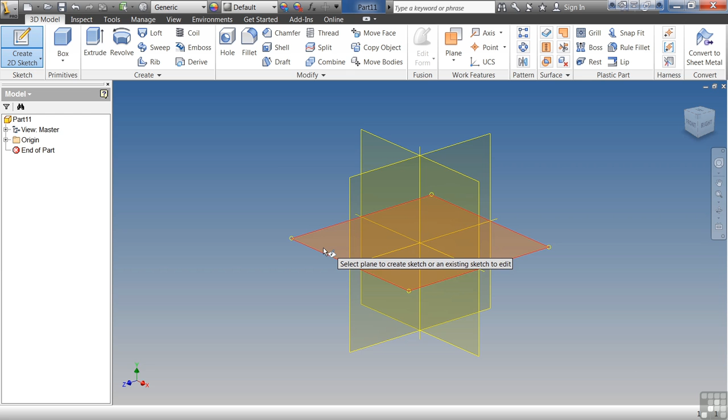Let's take a look. I'm going to go up to the New command, select the standard IPT, select Create. From here, I'm going to start a new 2D sketch. I'm going to select on my base plane. As I start to draw, you'll notice these little glyphs down by my cursor. These are Inventor trying to automatically apply geometric constraints to your drawing.

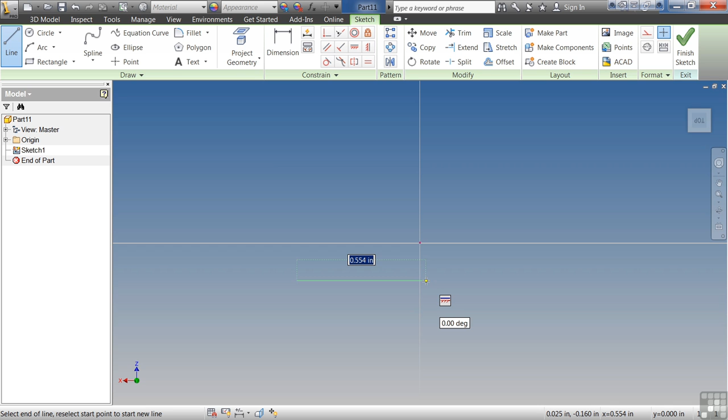The geometric constraint beside my cursor currently tells me that this line is always going to be held in a horizontal position. This is in relationship to the sketch and its current orientation. No matter what I do to the sketch, until I delete this constraint, it'll always be held horizontal. If I start to draw an arc, I get a glyph down there at the base telling me that it's going to be tangent to the existing line.

So I keep going. This line, not only will it be tangent, but it'll also be parallel to the other line. Now you will notice at the end it's giving me a dotted line, and basically that's an implied constraint, meaning that it's not actually going to put something on there, but it allows me the next operation to come down and go a perpendicular line and then it meets up perfectly. It's kind of like OSNAP and the object snap tracking in AutoCAD, if you're familiar with that. It's just a little helper tool to let you close off the geometry correctly.

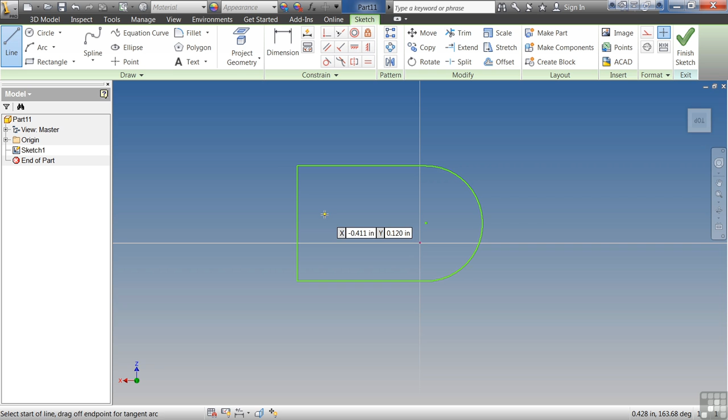Once you're happy with the geometric constraints you've added to your drawing, then you can add dimensional constraints. As I'm sketching, I get the implied constraints. But how do I know what constraints have been applied later on down the road? Or, even in this drawing, it's hard to remember what I've just done. If I hit Escape to get out of the line command, I can come up to this little glyph up here that says Show Constraints. Click on that, and then I can select on each line individually, and it'll tell me what constraints are assigned to that line.

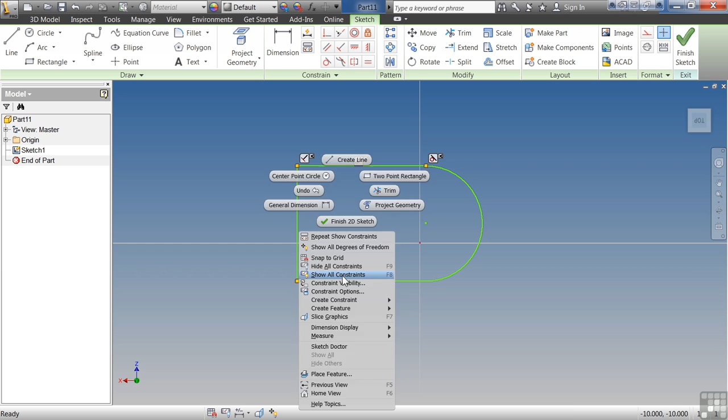Likewise, if I hit Escape, and I right-click, I can go down to Hide or Show All Constraints and see all the constraints in the drawing. The same command is available in the function key F8 for Show All Constraints and function key F9 to hide all constraints. Now, even though the constraints are not shown, they are still applied to the drawing. So if I come in here and try to do something, I can't modify the geometric constraints even though they're not shown. They just turn that off for convenience.

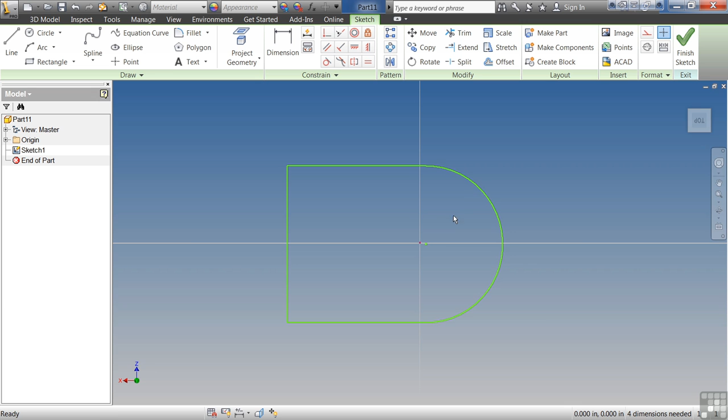So remember, if your drawing's doing something you don't expect it to do and you can't figure out why, do a quick F8 and see if it's automatically added a geometric constraint that you weren't expecting. To remove one of the geometric constraints, simply highlight it, hit delete on your keyboard, or you can click on it and right click and it'll give you the delete command. And so now that constraint is no longer there. I can actually warp and change the shape of my design.

Once we get the sketch fully geometrically constrained, then we move on to the dimensional constraints. With Inventor, you always start with the geometric. What you do is you draw something out, you get your basic shape how you want it, and then you start adding the geometric constraints and then the dimensional constraints.

For those of you who are familiar with AutoCAD, it may not seem intuitive to design this way. In AutoCAD, you had to draw everything out and create these precise sketches that didn't have any intelligence in them. So you could only do it one time, and then you had to go back and manually modify stuff. In Inventor, you get the design intent first by sketching out your basic shape, and then you start refining that design intent by adding geometric constraints, and then later with dimensional constraints.

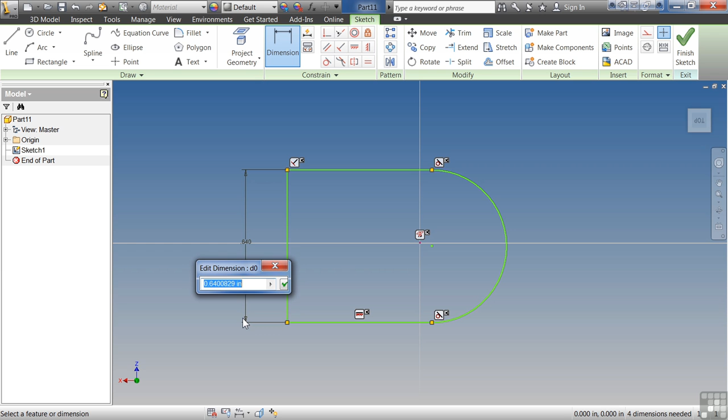The dimensional constraints in Inventor are intelligent constraints. If I say 2 inches here, and I decide that I need this to be smaller or larger, by editing the actual dimension, it will actually edit my geometry as well. This is intelligent design. This means that this has the intelligence to remember how you designed it.

Now, as you design and draw in a sketch environment in Inventor, you do get the direct input option. You'll notice there the little blue highlighted box. I can type in a number. If I hit enter, it will automatically draw that line at that distance. The other option when you're drawing with precise input is you can also add angles and other direct input options.

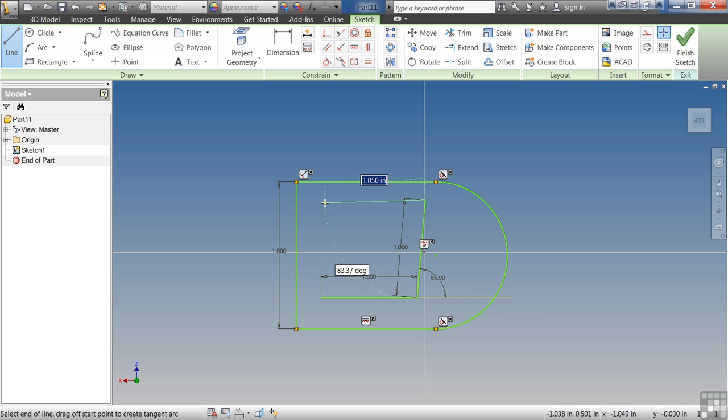So if I type in 1, then tab over to the angle, I can manually type in an angle. If I'm not happy with it, I can tab back to it, 85, tab over, and that will update my drawing. I can either hit enter to accept it, or I can left mouse pick and then move on to the next line. Ideally, for those of you who are new to Inventor, I highly encourage you not to do precise input. It's better to learn how to freeform sketch and get used to that.

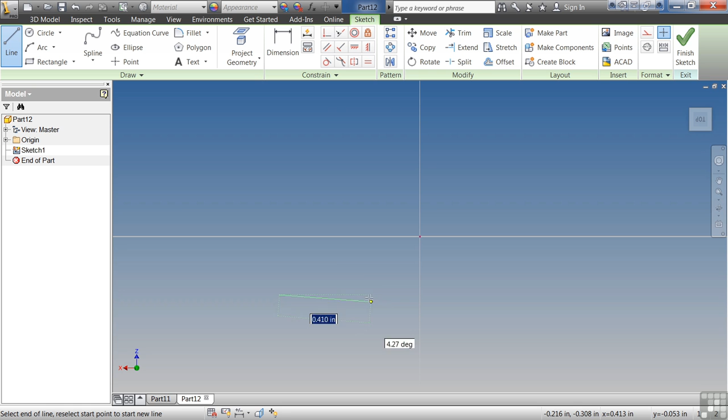Whenever we're sketching something out, I start a new drawing here, get a good clean slate, standard IPT, select create, select new sketch. If I'm drawing something out and I'm having to worry about what size it is, it's taking away from my design intent. So whenever I draw this out, for example, I can even hold down Control and not even have geometric constraints placed. I can draw some hideous sketch, and Inventor doesn't care.

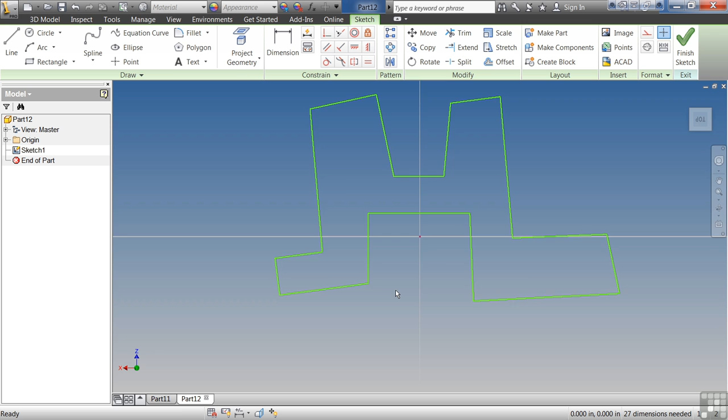Close it off there. Looks nothing like the finished product, but it looks close enough that I can start adding my constraints and controlling it. Once again, I'll add my geometric constraints first. I can start controlling how I want this to look. Then I would add my dimensional constraints and make sure that everything is fully constrained. A fully constrained sketch is very important in Inventor, and we'll get into that in the Creating 2D Sketches lesson.